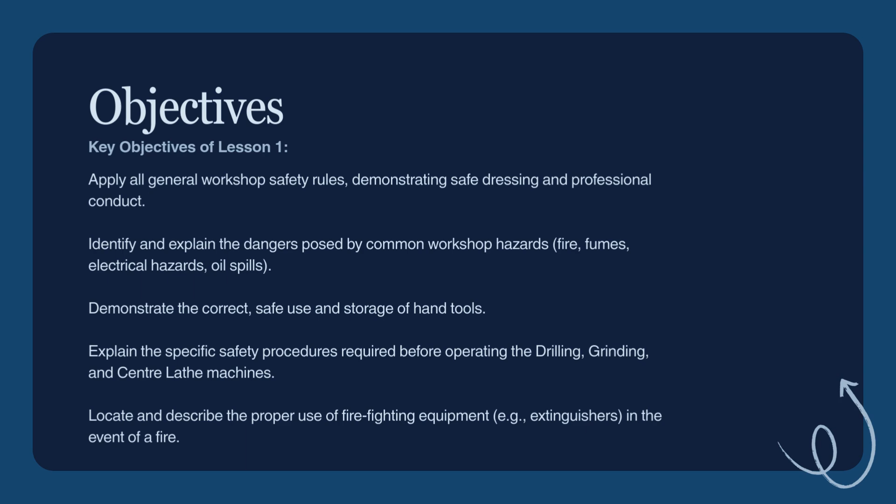By the end of this lesson, you will be able to apply general workshop safety rules, identify common hazards like fire and fumes, and demonstrate the correct use of hand tools. We will also cover specific operating procedures for the drill press, grinder, and center lathe, as well as how to handle firefighting equipment and emergency first aid situations.

First, what exactly is metalwork? Simply put, it is the art and science of shaping, forming, and joining metals to create useful products. It involves applying technical knowledge and practical skills, ranging from simple filing to complex machining and welding. Our goal is to master these tools and follow the design process from a raw idea to a finished, functioning product. However, a workshop can be a dangerous place if rules are ignored.

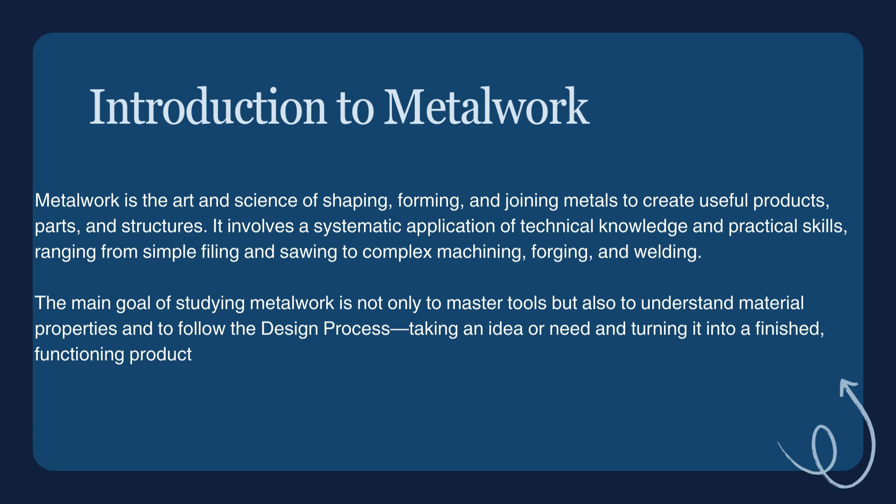So, before we touch a single tool, we must cover the essential rules of conduct. Your first line of defense is your own behavior. We have 9 key rules for the general workshop environment.

Number 1, never work alone. Always ensure a teacher or supervisor is present. Number 2, report accidents. Inform your instructor of any injury immediately, no matter how small. Number 3, no horseplay. Running, pushing, or practical jokes are strictly forbidden. These distractions turn a controlled space into a dangerous one.

Number 4, know your equipment. Never use a machine until you have been fully trained on its operation. Number 5, focus on the task. Avoid all distractions while operating equipment. Number 6, maintain order. Keep your work area and walkways clear to prevent trips and falls. Number 7, handle materials safely. Carry long items carefully so they do not endanger others.

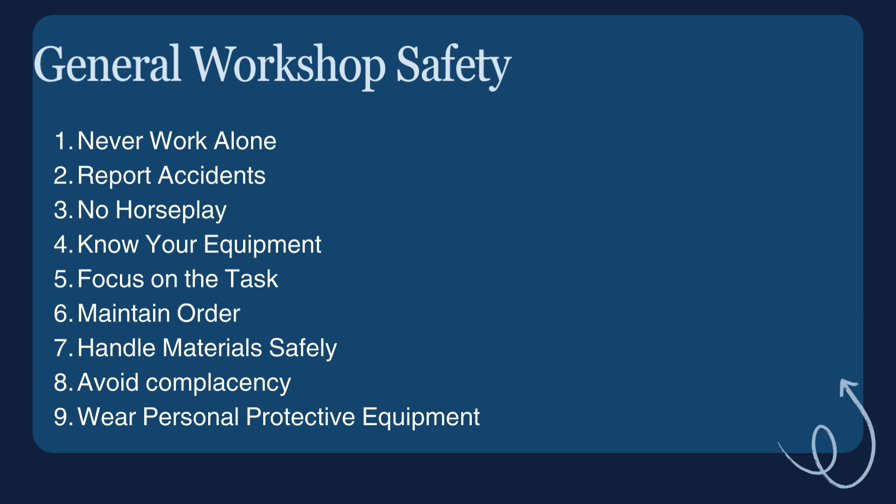And number 8, avoid complacency. Overconfidence leads to shortcuts. Follow the established safety procedures every single time, no matter how simple the task seems. And last, always put on personal protective equipment as required by the task.

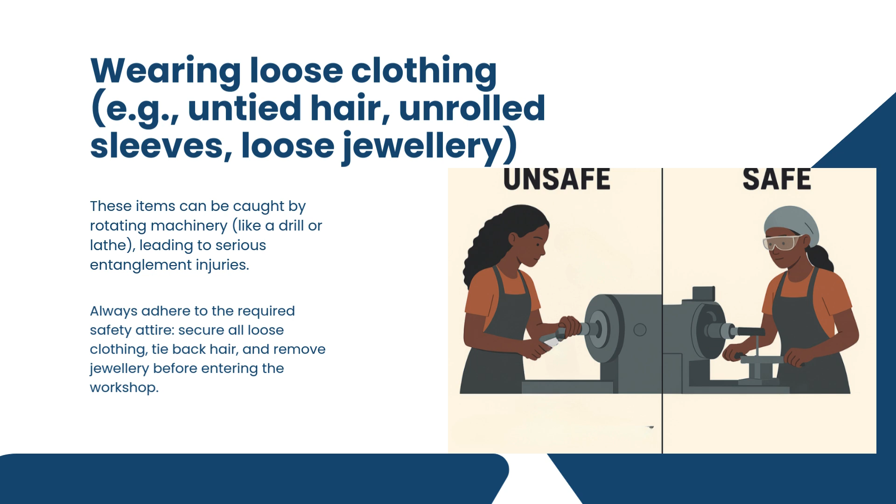Let's look at how these behaviors translate to real-world scenarios. For instance, wearing loose clothing, like untied hair, unrolled sleeves, or dangling jewelry, is a recipe for disaster. These items can be caught by rotating machinery, leading to severe entanglement injuries. The solution is simple. Secure all loose clothing, tie back long hair, and remove jewelry before entering the workshop.

Never run in the workshop. Do not throw objects or distract fellow students while work is in progress. Such behaviors turn a controlled environment into a dangerous and unpredictable space where accidents are likely to occur. Always remain focused and take your work seriously.

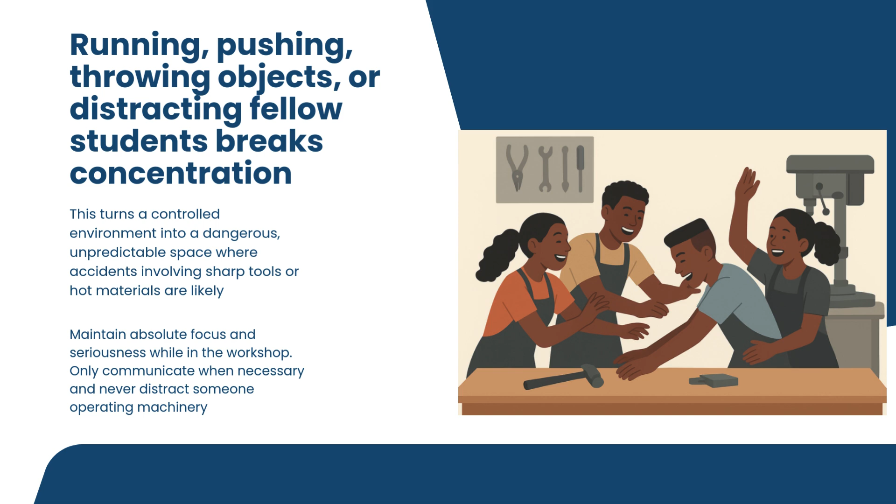Before operating any tool or machine, look around and warn others nearby. Wait until a person has finished using a tool or machine before communicating with them. In short, a workshop is not a playground.

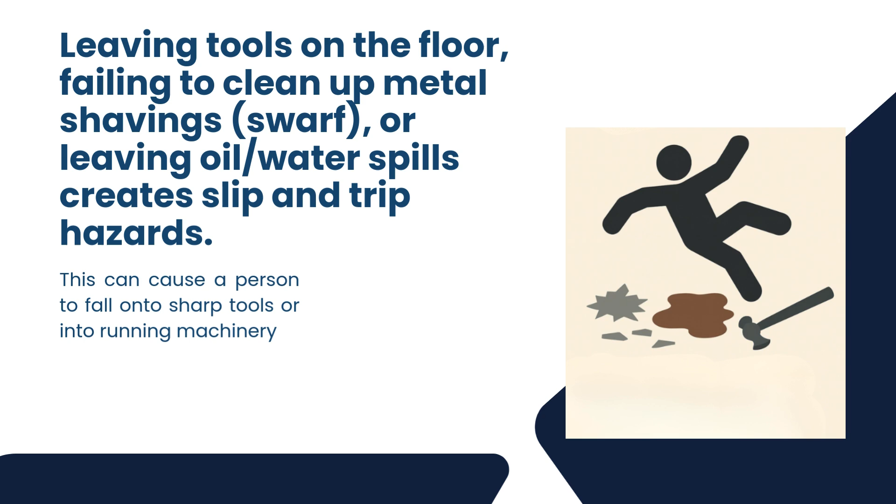Practice good housekeeping at all times. Never leave tools on workbenches after a workshop session. Always return tools to their designated storage areas. Keep all walkways clear of tools, workpieces, and cables, as these can cause trips and serious injuries. Clean up any spills immediately to prevent slip hazards. When using handheld power tools, work as close as possible to an electrical outlet to reduce trailing cables.

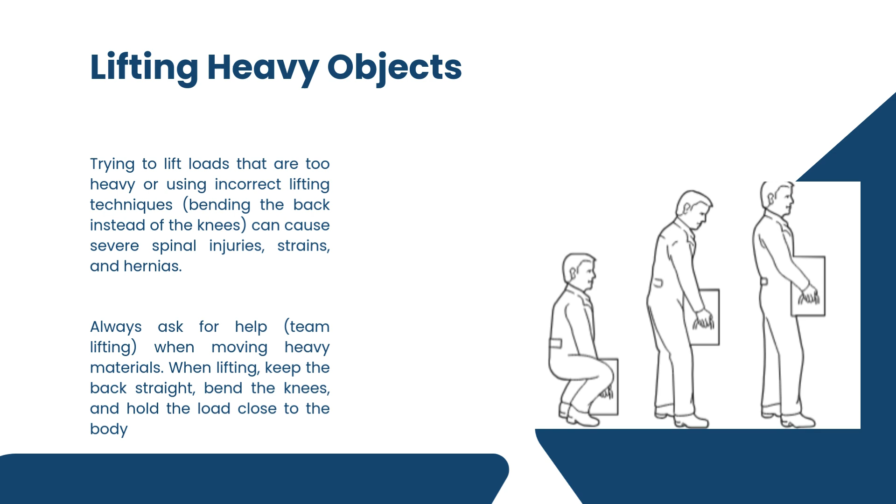Another common issue is lifting. Trying to lift heavy objects alone or incorrectly can cause permanent spinal injury. Always ask for help. If you must lift something alone, keep your back straight, bend your knees, and hold the load close to your body.

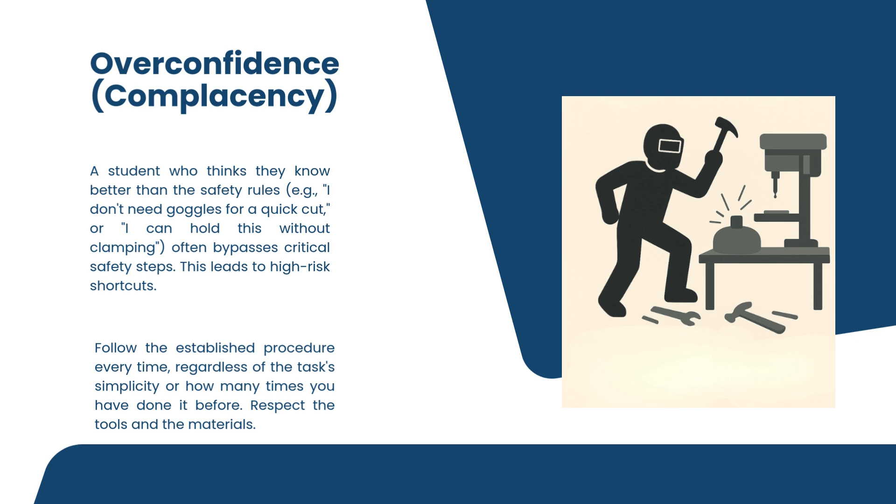Lastly, overconfidence is a serious hazard in the workshop. Never operate a tool or machine that you are not familiar with. If you do not understand a task, or if you have forgotten how to use a tool or machine, ask your teacher or supervisor for guidance. Never attempt any work that has not been assigned or approved by your teacher.

Now, let's talk about your mandatory safety attire. Wearing the correct protective clothing is not optional. It is essential for your safety in the workshop.

To begin with, you must wear overalls or a designated protective covering at all times. These protect your body and clothing from sharp edges, hot metal, sparks, oil, and other workshop hazards, while also preventing loose clothing from getting caught in moving parts.

Eye protection is critical. Always wear safety goggles or a face shield when operating machines, grinding, cutting, or welding. Flying chips, sparks, and dust can cause serious eye injuries or permanent vision loss in a split second.

Your footwear must be strong, closed-toe shoes, preferably with hard or reinforced soles. This protects your feet from falling tools, sharp materials, and hot objects. Sandals and open shoes are strictly prohibited because they offer no protection.

Gloves must be used correctly. Wear appropriate gloves when handling raw materials, sharp edges, or hot workpieces to prevent cuts and burns. However, never wear gloves when operating rotating machinery such as a drill press or lathe. Gloves can easily get caught, pulling your hand into the machine and causing severe injury.

Finally, always use ear protection when operating noisy machinery. Prolonged exposure to high noise levels can damage your hearing over time, even if you do not feel pain immediately. Ear protection helps preserve your hearing and allows you to work safely for longer periods. Remember, wearing the correct safety attire reduces the risk of injury and helps maintain a safe and professional workshop environment.

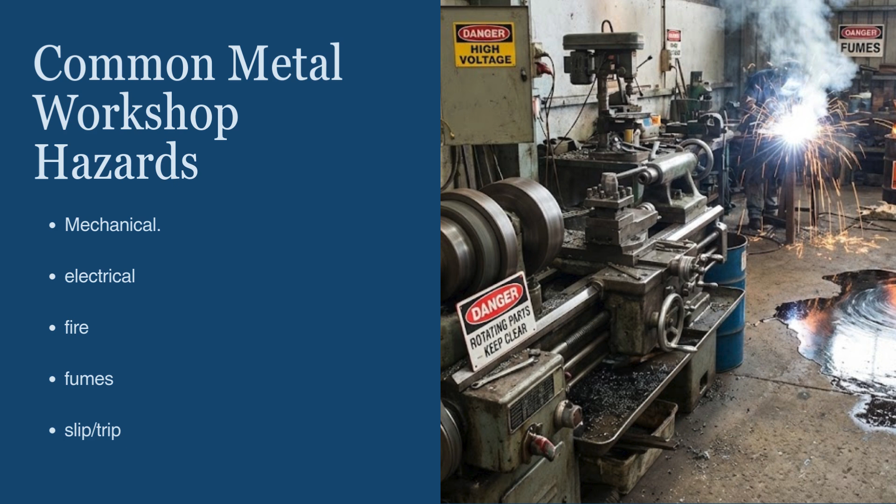Moving on from personal conduct, let us now identify the major hazards found in the workshop. A hazard is anything that has the potential to cause harm. This harm may be immediate, such as a cut or burn, or long-term, such as hearing loss or breathing problems. Some hazards are easy to see, while others may not be obvious at first. Identifying hazards early is one of the most important steps in preventing accidents.